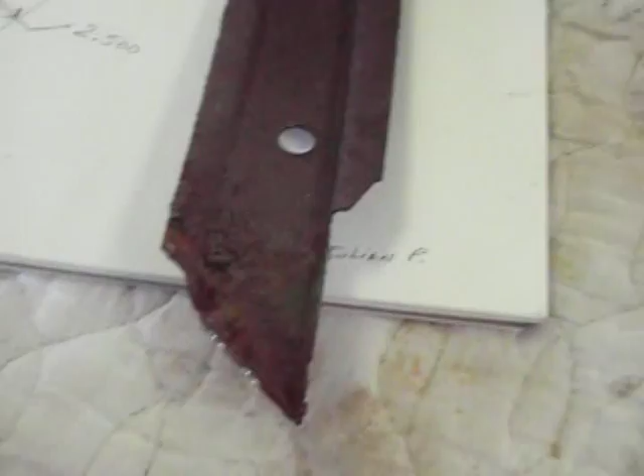Alright, Julian, this video is for you. You wanted some close-ups of this bracket.

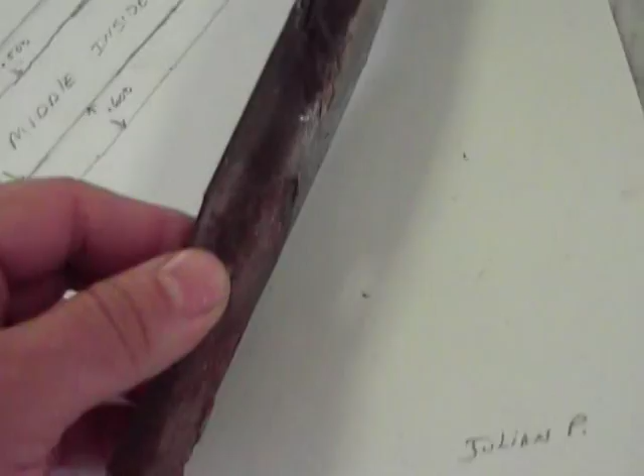This is on its side. This is the right side. The way the car is sitting right now, and the car's facing me, it would be sitting in there like that. This would be the inside of the panel. As you can see, it's going in here.

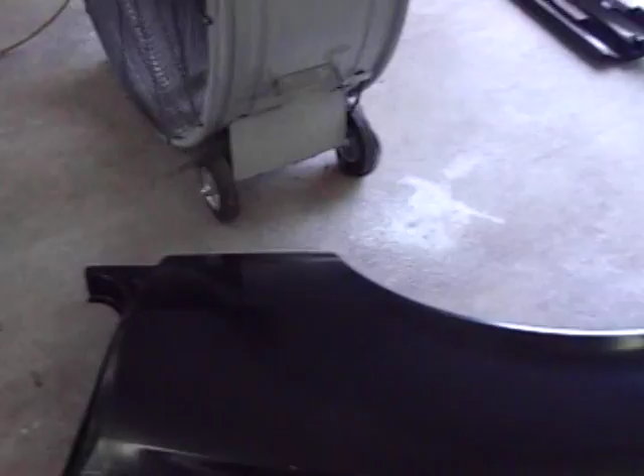It's got this slight bow to it, which would follow the contour of the inside of your panel up here, and I can show you that if you want. I tried to draw out a template here, and it's not a great one, but I made it to size basically, and you can see here.

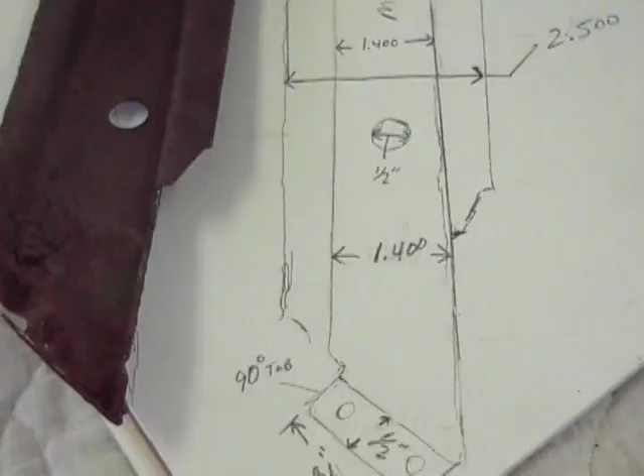So these are little tabs that come off the edge there that are drilled. Tab up on this side is that one there. I actually put holes in that one. There's no holes in this one. You actually weld this one through the front. You can see the little welds there where I went through the front of that panel. So this would sit like that. That would be the top. Okay.

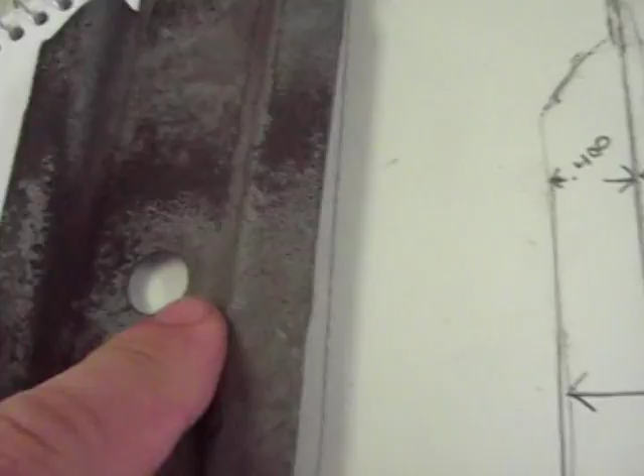And you can see the dimensions here. I've got 2 inches. It's a 90-degree tab. It's 1/2 inch wide. Comes down. It's about 1.400 inches in the center, right here, from here to here. 0.600 on this side. It's a little bit bigger than it is on this side, as you can see here.

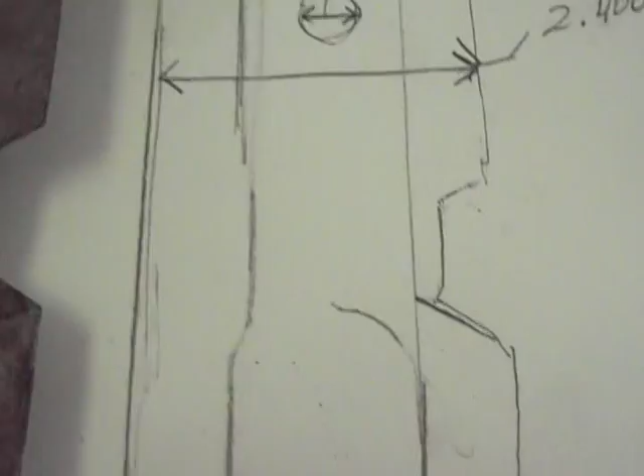Okay, as you come on down, the overall width of this up here is 2.400 inches, which would be from here to here. Then you can see I got the hole there. Then you come on down, it's got this little indentation here. I kind of put that in there.

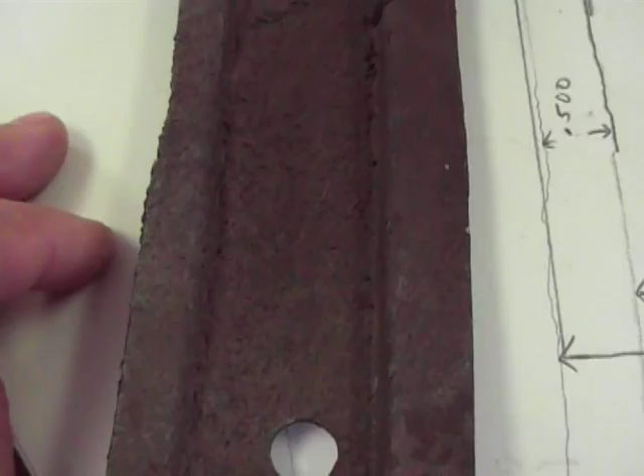And then same down here, this side here is about 0.500, a little bigger than it is up top, and you can kind of see how it comes out a little bit. All this stuff wouldn't make that big of a difference, since it's just an inside brace. Like if you made this whole side 0.500, it wouldn't matter at all. This doesn't touch anything, so it's just kind of out in the middle of nowhere.

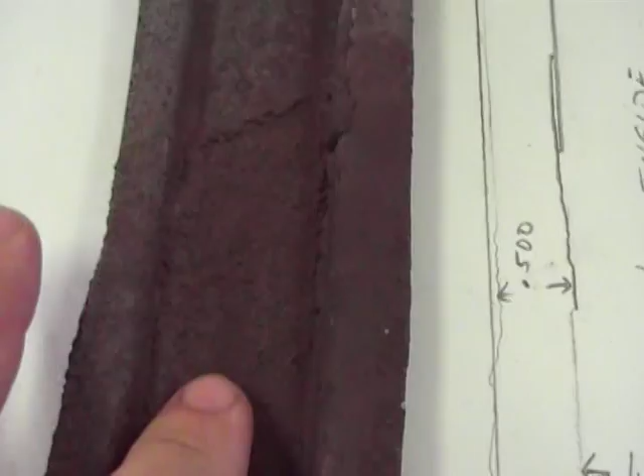0.600 on this side. What I've got written here is the middle inside. That's what I'm looking at here. You come on down, it's 1.400 in here. Same down here, all the way down to the bottom.

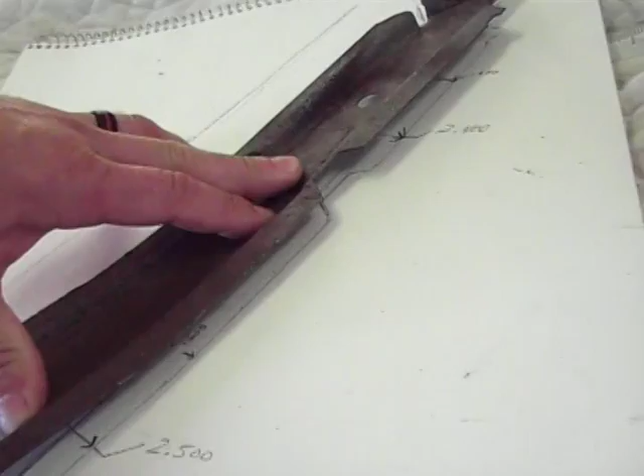And what I did was I actually set this and tried to trace it out the best I could. And since it's at that angle, I traced it and then pressed it down as I went up, basically, like that. So, like I said, that's at that angle. It's going to follow the angle of the inside of the quarter panel, and I'll lift that up here in a second and show you what that looks like.

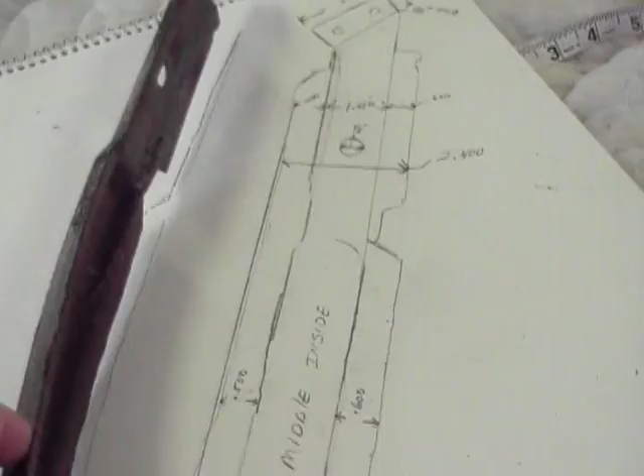But anyway, then I turned it up on its edge and tried to trace it out so you could see how it bows at that angle. And again, the best way I know to find that is, I'll flip that up and show you how it fits in there.

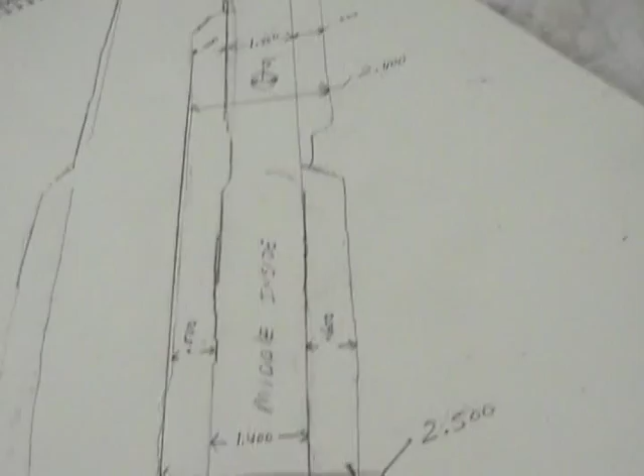So if you want me to send you this, like I said, it's not fantastic, and maybe you can just use what you're seeing here on the video and write it down or whatever, but this is actually pretty close to size.

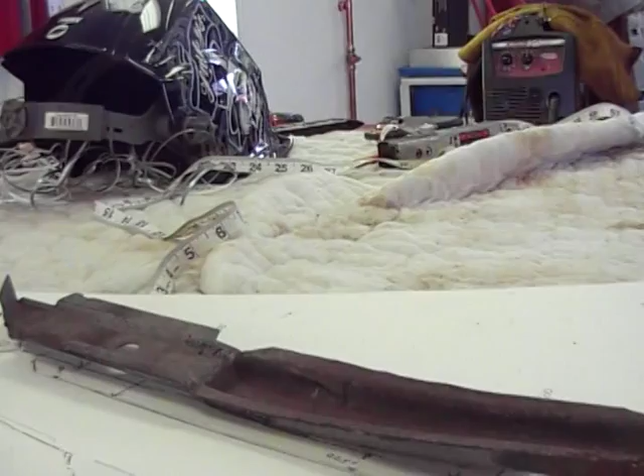The overall length of this, let me set the camera down for a second, get this where I can see what I'm doing. Alright, I'm going to use one of these because if I just go straight, it won't get the complete overall length. So from tip, I'll back out a little bit more. Hopefully you can see that.

From that tip to this tip down here is approximately 17¼ inches. So let's see, yeah, it's about 17¼ inches, and that's actually following that angle there.

So you flip it over and do it from the inside, it should be quite a bit smaller. Yeah, that way it's pretty close to the same. But that angle is going to pull a little bit of that away. So, alright, let me move this out of the way. I'm going to throw that panel up here and show you.

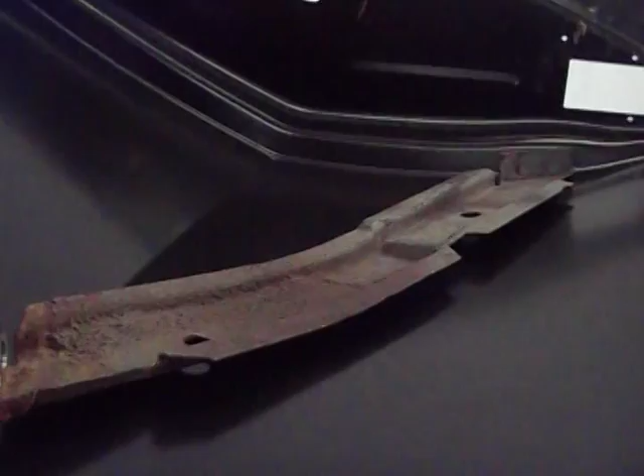Alright, like I said, this is the right hand panel, the passenger side panel. Trying to get you in a spot where you can see what I'm doing here. So this will come down here, and like I said, it doesn't actually touch this at all. It comes off maybe a 1/16 to an 1/8 of an inch. So you got a gap in there, and that's what you fill that sound deadener stuff up in. And then that end goes there.

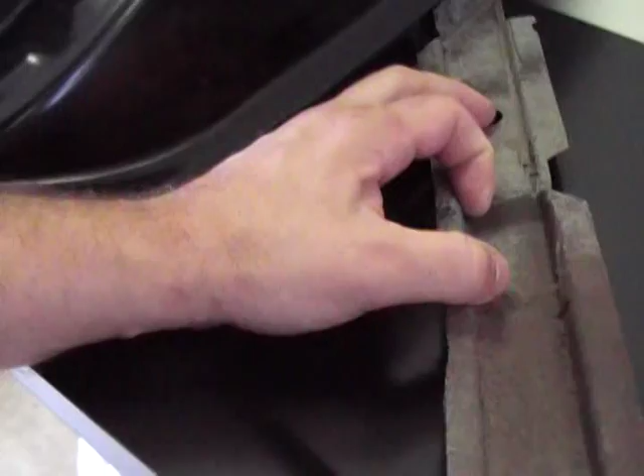Alright, so it's really hard to see this through this camera, trying to move it around. As you can see here, it'll follow that same bend and it'll go right up into here. So what you'll do is you'll pop 2 holes on this side right here for that. Okay, so that's where that went before. That's how it's going to look.

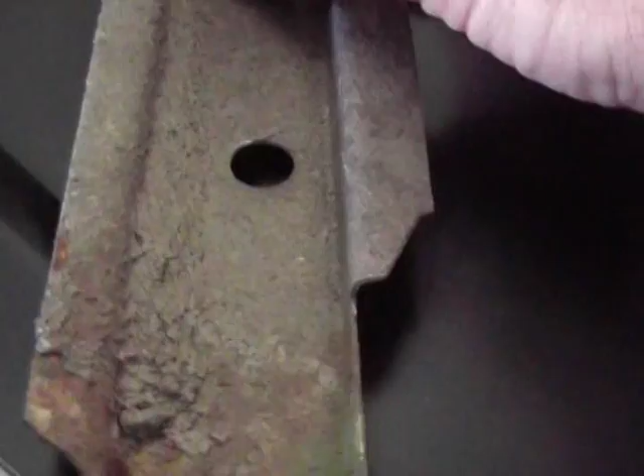Sorry about the shakiness of the camera. I'm trying to get as many angles as I can, and this panel doesn't want to sit still. It's trying to roll up on me.

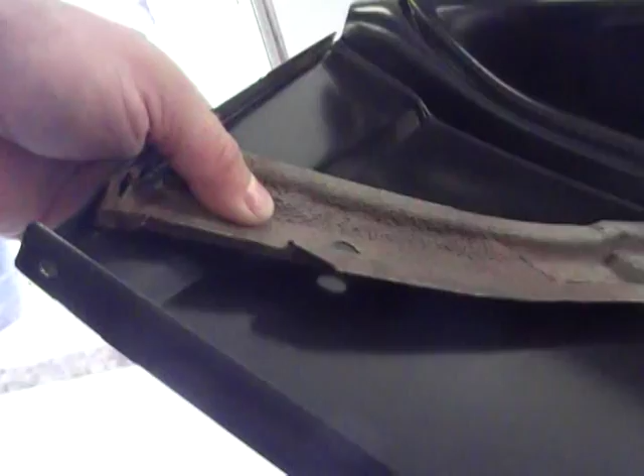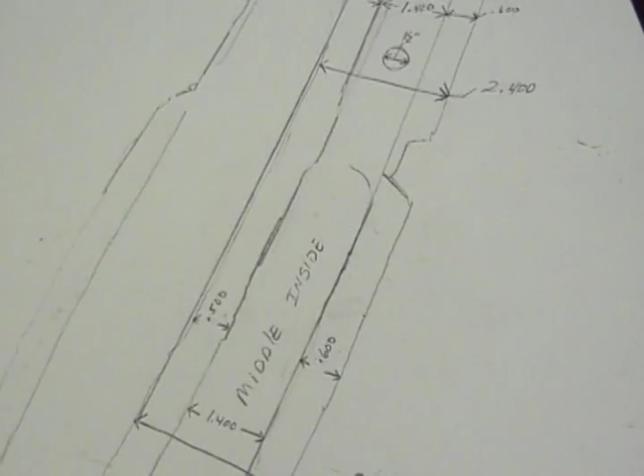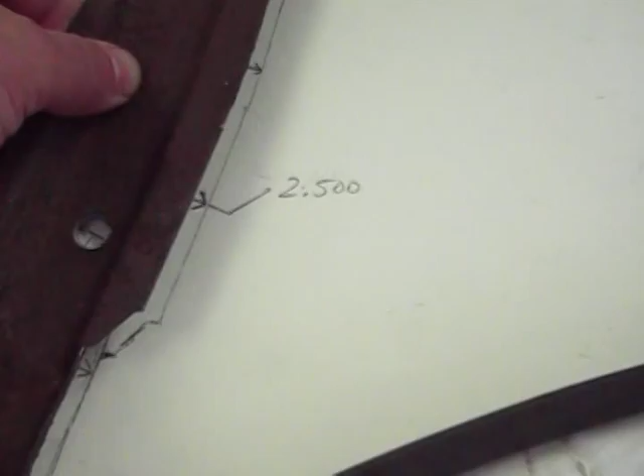So yeah, that's it. Like I said, if you want me to send you this, or if this is good enough that you can get what you need off of it. But again, that's kind of actual size there. So if you wanted to use that as a template or something, you probably could. You can see how I traced all that out. So just let me know what you want, and hopefully you can get a good look at all that.

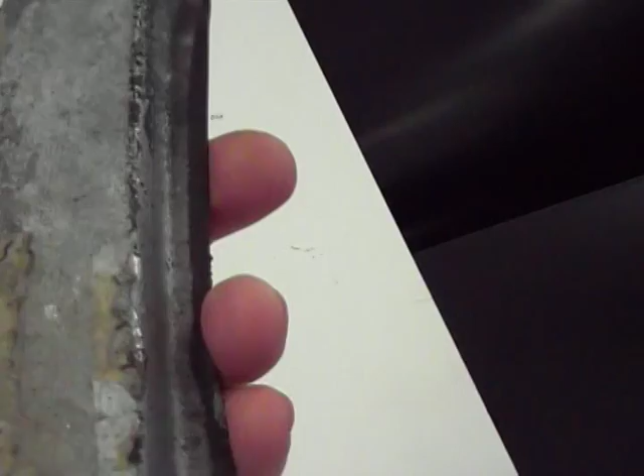This one's not that great either. It rusted out pretty bad down here at the bottom. I may have to weld a new tab on or build something for this. The upper part here is really good. And this is galvanized too, but obviously water sits down here, and after 40 years or whatever, it finally does start getting through.